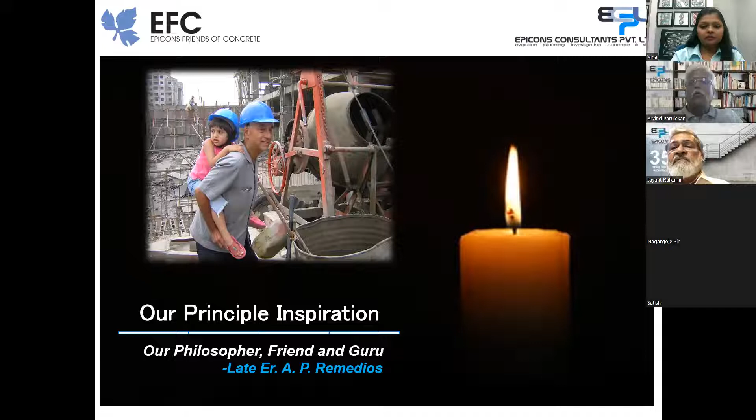Our inspiration goes to our friend, philosopher, and guru, late engineer A.P. Remedios. We started conducting workshops 23 years ago, and we conducted 79 workshops in 23 years, 35 webinars in the last 2 years, starting the webinar series since lockdown through our unit EFC dedicated to training. EFC is a humble effort to create a knowledge sharing platform and develop facilities for continued education for practicing structural engineers, corporate consultants, government and semi-government authorities, architects, builders, and of course faculty and students.

This is a quick graph of the webinars we have conducted. Today we are at Modern Materials and Technologies for Repairs, webinar 136. And the next webinar, which is actually a missed out number, will be a discussion on the first revision of IS 16700, on 19th November.

Our EFC team consists of, apart from myself, Mr. Anand Kulkarni, Mr. Ravindra Deshpande, Mr. Parulekar, Mr. Parashar Mugi, and Mr. P.P. Pandey. And with this, I conclude the introduction of Epicons Friends of Concrete on behalf of all the staff and our team members. Thank you.

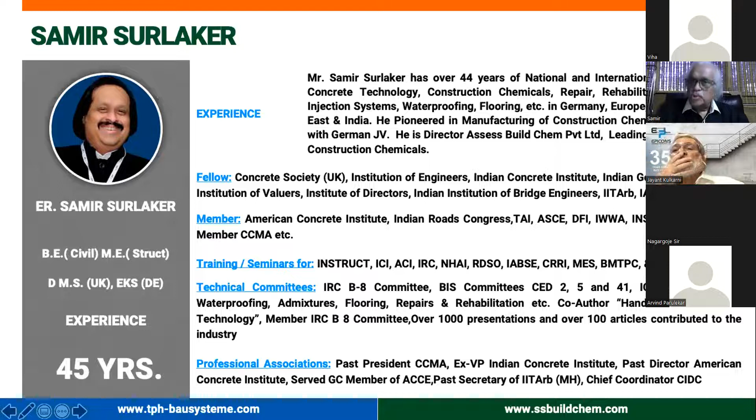I also thank Epicons, Friends of Concrete, and the Friend of Concrete is also my friend from VJTI. I really congratulate Epicons for conducting and disseminating so much knowledge through their workshops and training programs - I think no other person in the field of construction has done that. Now he has also chosen a very apt topic. And as Mr. Nagargoje rightly said, the problems of repairs are very difficult problems on the surface of it.

I shall try to make it as easy as possible. My presentation does not contain much of chemical equations and things like that, so I'll be coming straight to the main point. Concrete is the material we are going to talk about. And as Mr. Jayant rightly mentioned, concrete has got its problems.

It is very porous, and this porosity is one of the main reasons why the deterioration mechanism takes place. Concrete has got two very simple things: it has got cracks and capillaries. It is a water-based system - you can't avoid it.

These are the different causes of deterioration, which have also been mentioned subtly, and it's enough not to go into details as I'm talking to professionals. There is more knowledge facing me than facing you - you are all experts, professionals who have got a lot of experience in the field, so I don't think we should waste our time on some basic things.

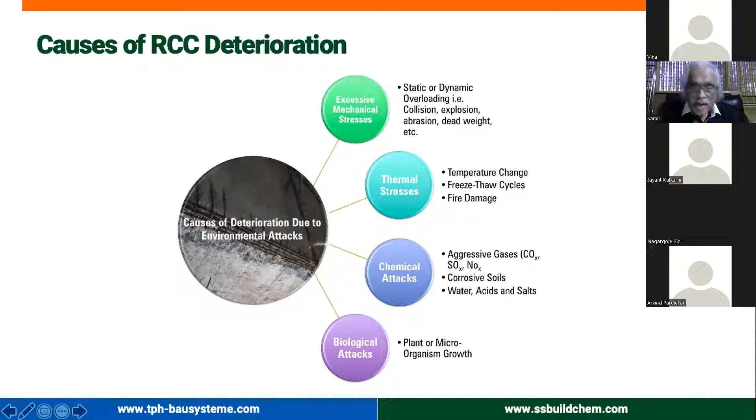The deterioration of concrete is a normal thing. It's a fallacy for us to assume that we can cast concrete and just leave it like that to fend for itself for its service life of 150 years. It requires a very strong and healthy asset management system, and this is exactly what we are missing in our country. We create the structures, but there are no asset management systems. Therefore, no budgets are provided for asset management, and that is one of the reasons why you see most of our structures are distressed.

A very simple thing: it's the carbon dioxide, chlorides and water that create corrosion. Basically, concrete is a basic system - the whole protection to concrete comes from its cover. That's the whole concept, it's so simple. But in reality, in our country or any other place, the concrete cover, which is supposed to be the best part of the structure since it is directly in contact with the environment at the concrete interaction stage, is actually one of the worst parts.

It has a water cement ratio 0.1 more, and it has 45 kg per cubic meter less cement. So this is how the concrete cover starts getting breached through carbonation or chlorides.

Basically, to take precautions, we should have very good quality spacers, bar spacers. The ones we are using are not healthy - if you look at it, these are very healthy bar spacers. Bar spacers have also got a code of practice, and these are tested, good quality bar spacers. This is approved even by the bullet train project. It is tested for sustainability - made out of green concrete - and tested for durability, that is for rapid chloride testing. So use good quality.

Then the simple corrosion, what we were taught in SSC - corrosion involves the most important things: chemistry and electricity. It goes through two stages: initiation and propagation. It's basically such a simple topic which people have tried to complicate, using a kind of psychological maintenance system to tell you something complicated about it.

It's a very, very simple thing to repair the concrete. And the code EN 1504 makes it very, very simple, uncomplicated. I would say to the extent it is almost non-engineering.

Carbonation is nothing, but since there is constant acid rain, the pH of the concrete starts shifting from 13.2, and the reinforcement bar, which is used to stay in the alkaline condition, starts getting into the acidic zone, and the rusting starts. Such a simple process. By rusting, what happens physically is the volume expands up to about 7 times.

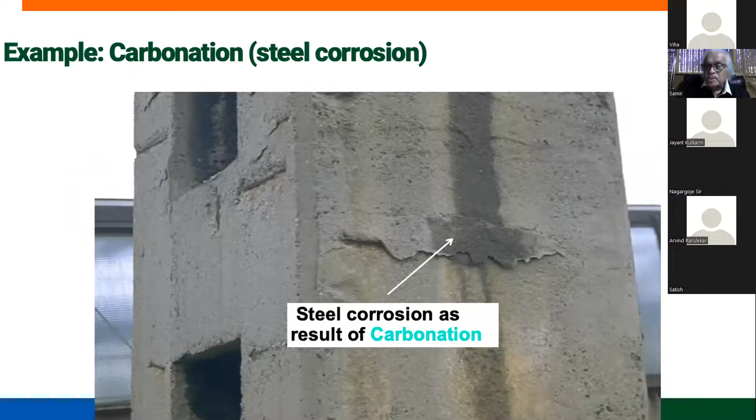Concrete is not so good, or concrete is bad in tensile stresses. So eventually the cover gets cracked. Once the first crack occurs, more deleterious substances, more acids enter the reinforcement and enter the concrete, and the rusting starts. The corrosion controlling constituents which create the corrosion and rusting are to be arrested. And once you repair, the main thing is to stop that corrosion at that status quo. So this is due to carbonation.

With chlorides, it is a little bit dangerous because there you get something called corrosion by pitting, and pitting is where you get, say, the reinforcement section goes tremendously low. This normally happens in marine conditions, or also many buildings in our city, like the Bandra Kurla complex area. There many structures are having a lot of chlorides.

So you exactly know how much time it will be before rusting occurs. Now we have these tools available to us. So my request to top level people like Mr. Agarwal and the MMRDA, the specification makers and the consultants, please use these tools to find out what is the residual life of the structures.

These tools continue to give you the systems of repairs, even the systems of repairs which are highly dependent on the money available. It can tell you that if you make X repairs, it will remain for 5 years. If you make Y repairs, it will remain for 10 years. If you want it to remain for 40 years, this is the method to be adopted. I think for a country like ours, with limited resources, this will be the thing.

Now, this is what happens. The water comes, and this is another major problem that building societies face, Mr. Nagargoje, Mr. Sen. The water which is exhibited inside your house is coming from the wet areas of the person on the top level.

It is very unfortunate because we have constructed it by fault. And sometimes, in many new buildings, we have to make the toilet blocks in places where it is not provided. I shall also be touching on this shortly as time passes, but this is what happens. And the person on top of you does not allow you to touch, saying nothing is happening to me unless something starts from his top.

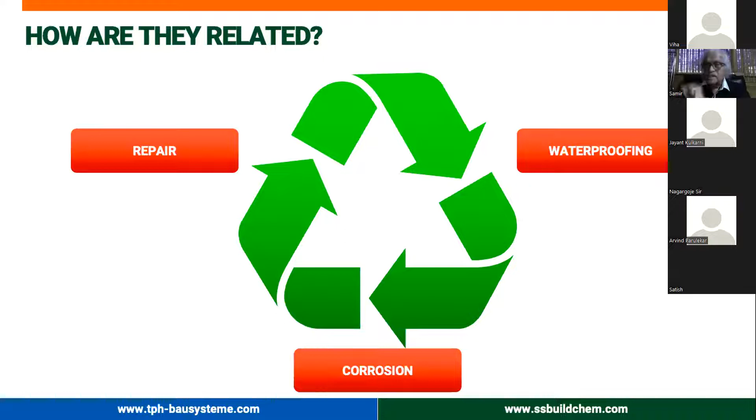So we have two types of things. We have waterproofing, which is preventive, which I think we are not here to talk more about. But even if you want to shift a toilet, I said just touch that portion, and the rest of what we are doing is everything remedial. Remedial waterproofing is nothing but repairs. I think this is how these things are connected.

So the logical steps of action: concrete, we don't have that much money, bridges cannot be just thrown out, so concrete needs to be repaired. Then how do we do it? So materials are the key. The materials are the key.

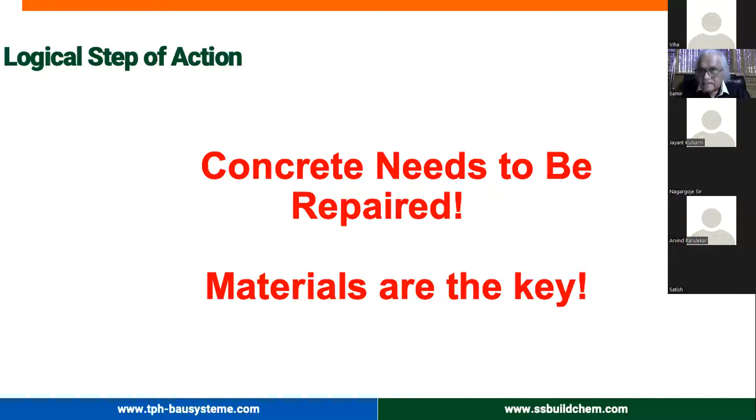In spite of it, please do not take - I'm a construction chemical manufacturer, I've been president of CCMA for 5 years, active member - please do not take specifications from construction chemical manufacturers. We do not supply any construction chemicals as part of our policy, since Mr. Jain talked about his policy. We supply materials to repair only when a structural consultant has given his okay. It's not my job. My job is only to make a material of the properties as decided by the structural consultant. It is basically engineering, not materials.

I make the materials, and now the biggest problem in the world is the durability of repairs. Those days are gone. Now people are making repairs, and when they make it with wrong materials, not stopping the corrosion, then the durability is affected. And that is costing the country more and more and more money. I think this should be stopped.

I shall also show you the development in that a little bit when I come to it. There are ways, but they are not rust converters. Rust converter means instead of Fe2O3, if you make it FePO4. Then he said use 20% SBR solution or acrylic solution, cure all - that means one pill for all the things.

We did this, and I said just keep it below. It was repaired - there's reinforcement here, reinforcement here. Within about a week or two weeks time, the crack surfaced. It's very easy to identify a repair crack which comes through reinforcement - it is straight. And then they changed the specifications.

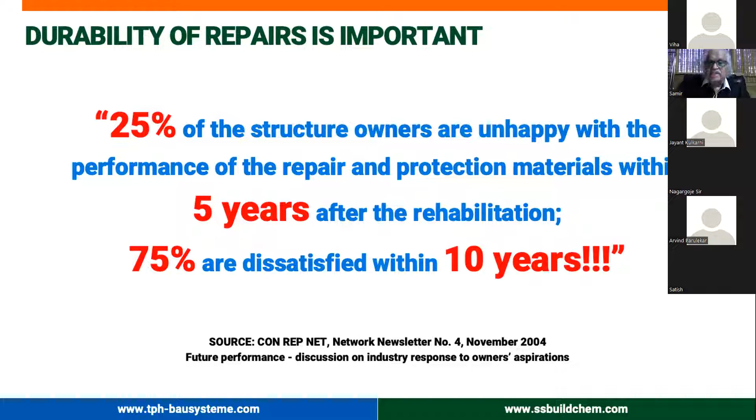So this is the standard statement. Most of the statements I have not said. Everywhere down below, the sources are given. 25% of the structure owners are unhappy with the performance of the repair and protection material within 5 years, 75% are dissatisfied within 10 years. And this is exactly where our money is drained out.

So first, all the NDT, where Epicons and other companies can do all the NDT testing. After doing the testing, normally they give you big 50, 60 page reports. It's the same as when you go to a doctor, he gives you an ECG in different colors, but you don't know what is to be done. The aim of diagnosis is only to find out the loss of section. If the section of the bar as existing today is less than 80% of as designed, it is a structural repair. Both the steps overlap.

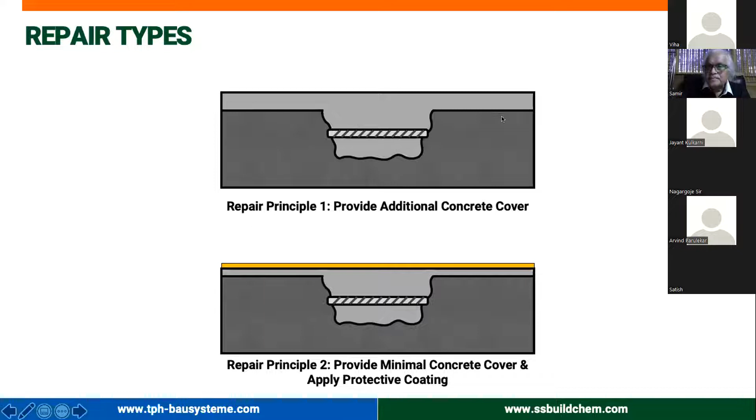Repair means creation or recreation of cover. You can create it, whether by guniting, jacketing, replacing, or reprofiling. But when you cannot do it, we have to resort to a coating, which is also calculated: X thickness of a protective coating. The protective coating varies from Jammu and Kashmir to the sea. This gives you something called equivalent cover. This can all be tested and done in India. What is important is you have to recreate the integrity. A good bond coat is required. Anyway, I'll go a little quick.

So any repair system designed with predetermined materials in mind will lead to failure. You go anywhere and you find a column which is distressed.

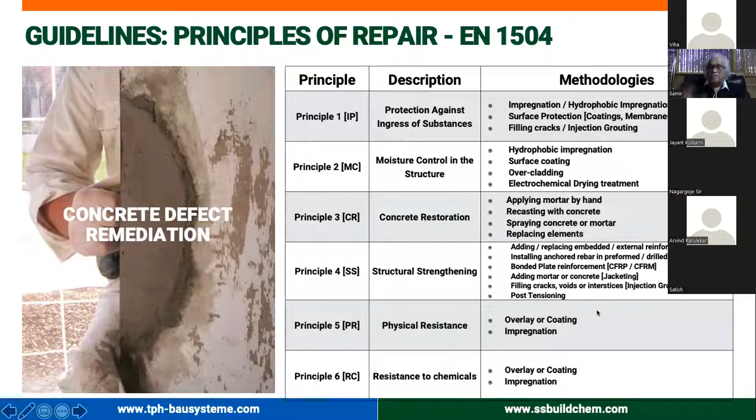So principle 1 means, just to give an example, protection against ingress of substances. The methodology is impregnation, hydrophobic impregnation, surface protection, filling cracks and injection. It doesn't say that if the structure is suffering from principle 1, you go here. You go on adding replace embedment, you go bonded plate reinforcement, you make post tensioning. And this is exactly what happens. If this can be stopped in the country, I shall be very thankful that my 40 or 45 minutes will be used.

Sir, you want to ask a question? Hello? Nagargoje sir, you want to ask a question? No, sir. No. Okay, because I saw your hand. No, no.

So this is the thing. We don't have to use it. I saw a specification in Goa. You'll be shocked. It is in Goa, our building of Kala Academy, which I think Mr. Jain knows well. It is a 10,000 square meter area. Migrating corrosion inhibitor is specified. A repair which could have been done in 3 or 4 crores is done in 49 crores. And now it has gone for inquiry. It's very unfortunate in a country where we don't have money that we are going into these things.

But this is very, very clear now. Know the principle. This part is made by us. This part is made by the material manufacturers. Whether you go to us or you go to Sika or BASF, you will get the same answers. Go to ethical companies, go to ethical engineers, and then I think you'll be able to save a lot of money. So these are cracks that you know. Cracks means injections.

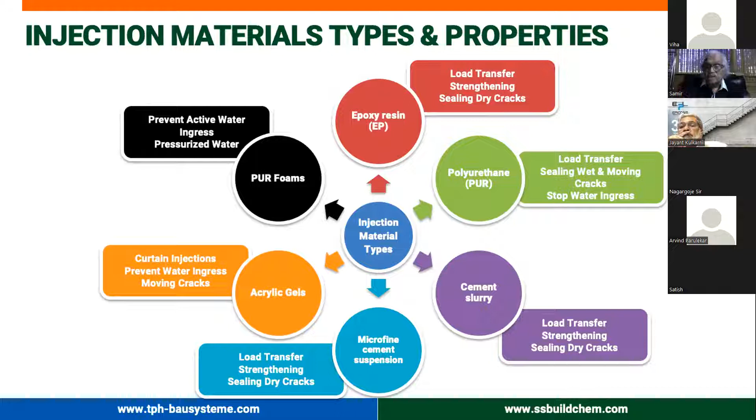Just to remove and dispel all this doubt, I made a presentation to CIDC, to government, of about 30 to 35 minutes, in which I showed the different methods of injections. And for trained people, these are available in the country. It depends on the width of the crack. It has got several things. These charts I can send you, which material is to be used in which cracks. And please go to the experts.

We can sit on the same side of the table and argue about it. It is not what is the cost. The very second question is, what is the cost? Cost of what? So there are ways. And then there are machineries. When you use modern materials, you have to bring in modern machineries. When you bring modern machineries, you have to get people trained.

I have trained 25 people in Germany over the last 20 to 25 years. And we are the only company having applicators all over India, and we can solve any waterproofing problem, including the one I showed at the top. So it's a different type of packers to be used.

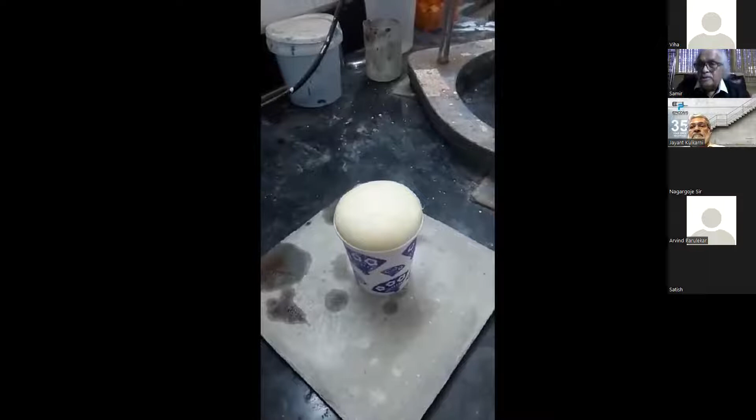But this is very impressive. This has got a life of 3 months. And waterproofing and the concrete should have a life of more than 150 years. So these are different other types of resins. So please be careful.

So these are now other polyurethanes. They are compatible, but they don't foam. These are very flexible. This can be used in this type of problem, when the water is coming from the bottom. We did a project here on Park Road Beach, a brand new building. We did about 55 lakhs of repairs, injecting it from the bottom. But it is not a foam. This is by injections. This has got an engineering life of 140 years, with certifications. Plus, it is sustainable.

So this is where the problem comes from. These are the problems in toilets. This is the system we have adopted. So water comes in. And these are the modern tools, modern means. Whenever you do repairs, you've got this type of sleeves available. These are also not plastics. These are a very special material made by only one company in Germany, and we all buy from them. This is flexible polyolefins, and it remains for 40 years. So this will stop it. It is not a rubber. It is not a PVC.

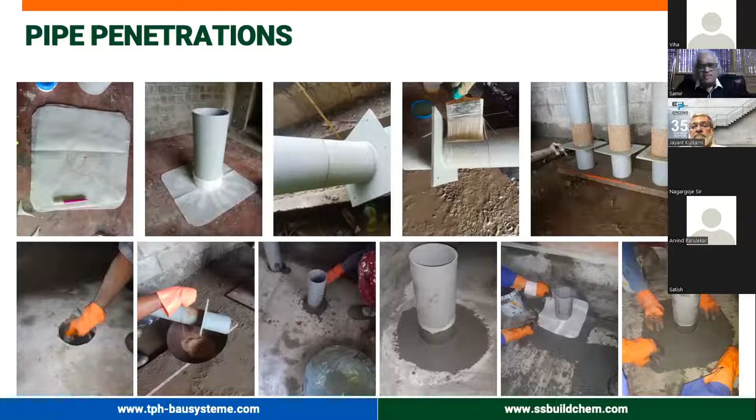The moment someone does it, another person says, I can also. These are the tapes, your flashing tapes. If you use this type of flashing tape at every corner, it can stick with the tile adhesives. Put a tile here, put a tile here. Water will never go through it. No joint sealant is required. So when you're shifting the position, you can use this on the whole area. You can make a bathroom anywhere you want by puncturing the slab using these techniques. I've got specifications; I will give them to you.

Then the normal things to be done. A tile adhesive is compulsory because new tiles don't have water absorption capacity. You have to have a chemical bonding. And now be careful of the details. You see, beautiful engineers.

You see now he has put the drain. The drain is not at the bottom, it is on the top. So please be careful. Detailing is very important. We have got detailed specifications for all the different types of toilets with all different types of materials. This is for a flat slab.

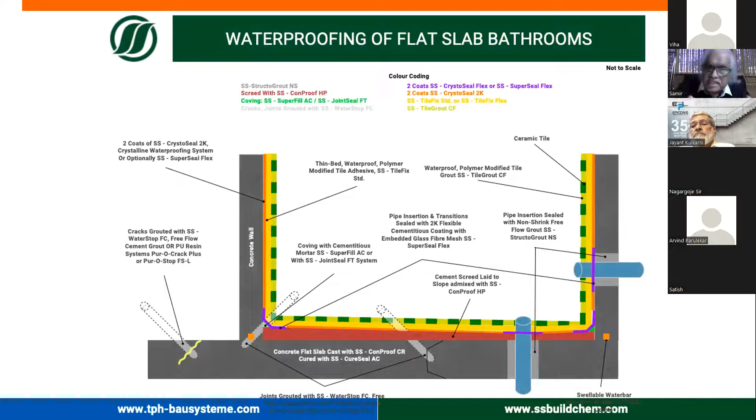This is for ones which are wall mounted. This is for ones where we are already having some problems. You can inject it from the bottom. But different things have got different systems. Then come the problems from the walls. This also can be solved.

Then we have got very specialized new plaster admixtures, which can make some beautiful plasters. I don't think we'll have time, but we can use those things. We have also developed specialized plasters which can take a 5 bar pressure. 5 bar means 50 meter pressure. You can simply put it from outside and water won't go inside. It is hydrophobic. Even when you break it inside, there is hydrophobicity.

So positive waterproofing from the negative side. The gels allow you to do this. If you can't go out, we are in a position to inject through and through your basement walls. We can go below the basement, on the side of the basement.

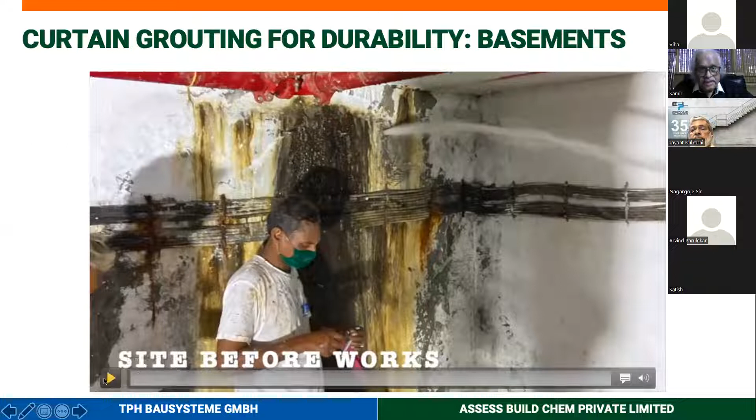This is one of the basements, 16 meters below, which we did in Bandra Kurla Complex. You can see it here. I will not run the full videos, but you can see the water coming. This is the 6th basement in Bombay, or Mumbai. But you need the right materials, right machinery, and right applicators.

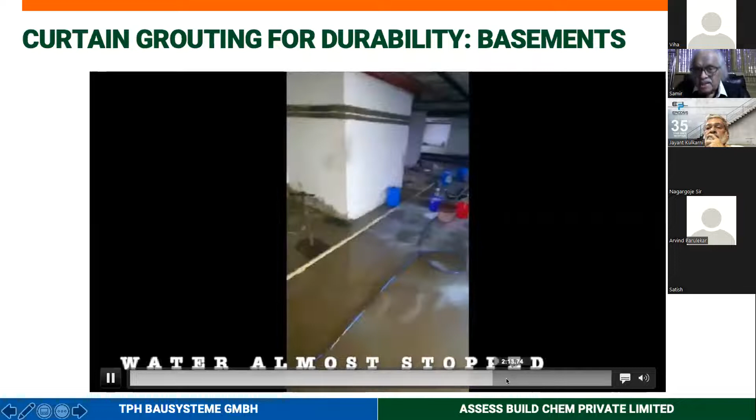This is the machinery. These are the materials. And we have these materials in our country. In about 2 hours or so, it is totally stopped. It is not by putting some cloth inside, some lead inside, some cement inside. These acrylic gels can stop the water within 9 seconds. So these things are available. Please use them to your advantage.

Now these are tested. It has got a test report. These gels are tested for 20 years. The normal gels which have been used in the country have a life of 3 months. That is poisonous. It harms your groundwater sustainability. This has been tested for 20 years for its expansion and contraction because these are fortified gels. And this has an engineering life of 120 years.

We are engineers. Let us have the engineering life. The other gel is only 3 months and poisonous. And when it comes to sustainability, I would like to read this. These are still used in our country without asking. This is acrylamide, where a big accident took place. Because this is in the public domain, I don't care; the name of the company is put here. This is 75 rupees per kilo. You see here.

330,000 kg of milk had to be thrown away. 370 animals had to be slaughtered. 29 private wells were found contaminated, and this is in Europe. So for every material that you purchase for injection, which is going to come into contact with your groundwater, especially in places like the Himalayas where the Ganges water is so pure, please ask for a groundwater safety certificate.

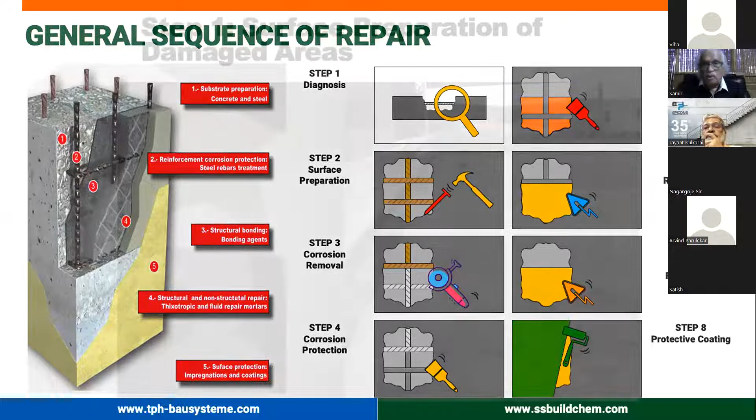Sustainability. So this is the normal. This I'm not going into; these are with old materials. These are the steps of repairs. I will wind up in another 10 minutes, so don't worry. These are the steps of repairs. Each and every step is important. Surface preparation. Then you have to stop the corrosion, at least at the status quo.

These are different ways. There is natural protection by alkalinity, which is the best one. Then the epoxies, that is the insulation. Then there is cathodic protection. Different principles; you can use any principle. Now these are very specialized coatings. These coatings can be used for steel bridges.

We can repair a 100-year-old steel bridge within about 1 day, without mess, without sandblasting, without harming the environment. This is a product which is as per P11, as per EN 1504. It is called an oxide converter. It arrests the process of oxidation. It is an active coating and a barrier coating. It stops the corrosion within 20 minutes.

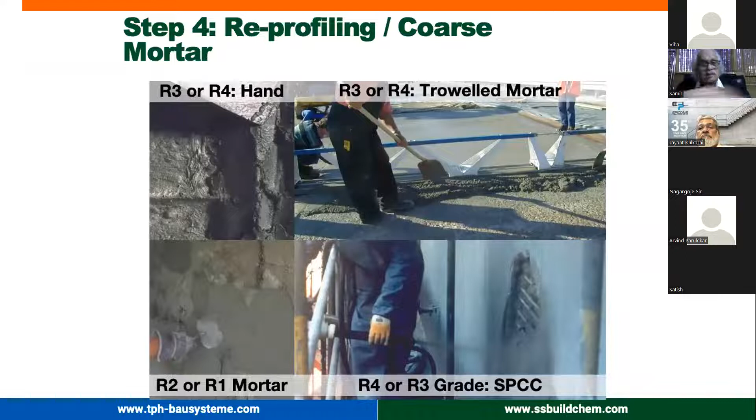It is also having a surface barrier. So then bond coat is the most important part, because homogeneity is to be established between old materials and new materials. You can create the mortar whichever way. You can cast it. You can put on hand-packed mortars. You can use a micro concrete. This is what we call concrete replacement. You can do guniting depending on the areas.

And now you see the simplicity. People will tell you, please use a material. It should be fiber containing. It should be X containing. It should be Y containing. No, very simple. Structural repair: the EN 1504 categories. Structural repair category should be greater than 45 MPa, category R4 plus durability required. Non-structural repair so and so, that is in heritage. We have also a full range of heritage mortars, which is lime based, no cement. It is so simple. So performance criteria must replace the prescriptive criteria.

So properties of the cure, you see how simple are the properties. Fresh mortar should have a reduced water demand, quick and complete drying. What they do is to cheat you. They put microsilica inside. When you put microsilica inside, you get cracks. To stop those cracks, they put fibers inside. And then they tell you it should be fiber. What the hell do you have to do with whether it contains fibers or not? Your job should be: it should be low shrinkage, test the shrinkage, high tensile strength, enough flexibility, and a strong bond. So let us make it very, very, very simple.

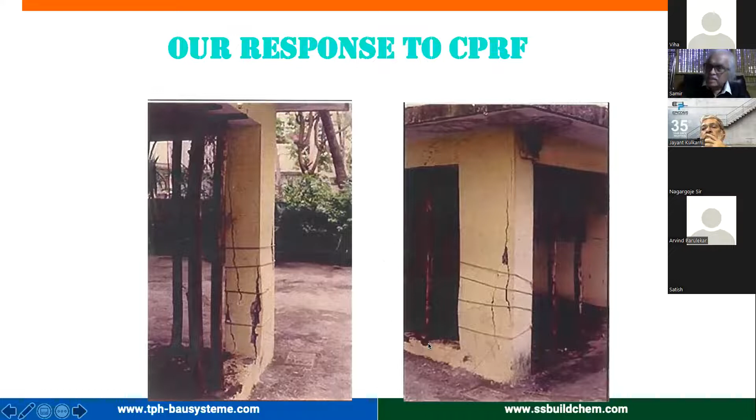But same thing is what we are doing. This is the advancement, new materials. We are having something called FRCM system, fiber reinforced cementitious matrix. This is not a mesh. This is a net. Epoxies have got, not shelf life, pot life. So when it becomes hot, I think our friend is talking on the fire resistant mortars, the epoxy starts melting, even in Rajasthan, because after 55 degrees the glass transition changes. This is cement based, so it doesn't burn.

There is a code of design. This has to be designed. This is in 2018, Guide to Design and Construction of Externally Bonded Fabric. But they don't want to bring it to our country, because they want to cheat you with fabric, with the sari wrapping, with epoxy resins, with cementitious mortars. Tested for fire resistance. How is it to be done? Very simple. You put a mortar, you put a fiber embedded, you close it.

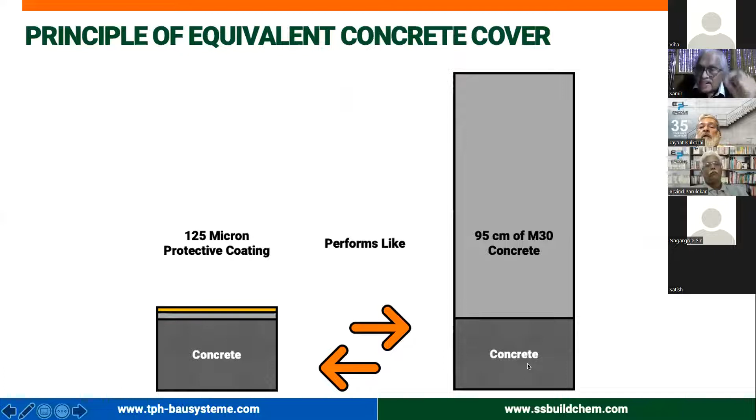And the last step of repairs is a must. It is protection of concrete, by anti-carbonation or any other coating against chlorides. Because if you see here, your life in years depends solely on carbonation, initiation of corrosion and propagation. So this is anti-carbonation coatings. You can also measure it engineering-wise: 125 micron of a protective coating performs like 95 centimeter of M30 concrete. So an equivalent cover can always be calculated in India, tested in India, specified in India.

If you see it here, it should have a crack bridging capacity in bridges. Now, without putting all these things, they will say it should have interpenetrating network, 2 coats, 1 coat micaceous iron oxide pigments, 2 coats epoxy, 4th coat polyurethane. So this is nonsense. Because epoxy is not flexible, epoxy is not ultraviolet resistant, epoxy has no breathing capacity. So why do you use it when there are codes of practice?

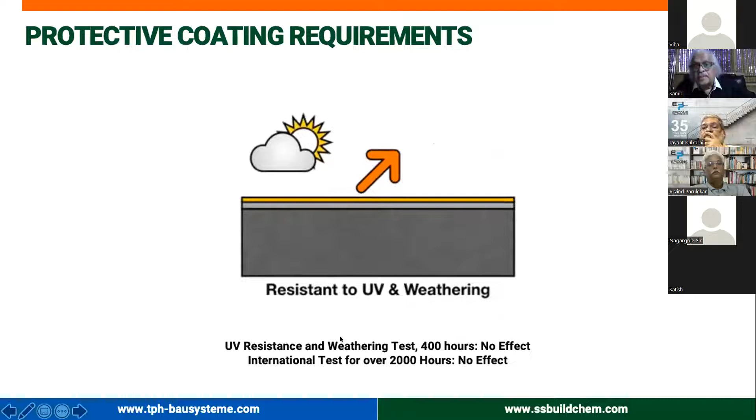It should be chloride resistant when you are using it in coastal conditions and in water. Crack bridging is very, very important for dynamic loads, all our bridges. And we started using this in India about 25 years back. And the bridge that we did in Kerala for HCC is still living. We did the JJ bridge, M75 concrete. The consultant who came asked why do we want it for M75 concrete? We quoted it. He said it will increase the life of the concrete by 36 years.

So this is important. Crack bridging capacity can be tested in India. It should be open to water vapor diffusion - contradictory as it sounds. Water should not go in, but water vapor should escape. So this is how it is.

By virtue of chemistry, the small fishes can escape out. It is like this - water vapor can go out because it has a low molecular weight. This is the breathable coating.

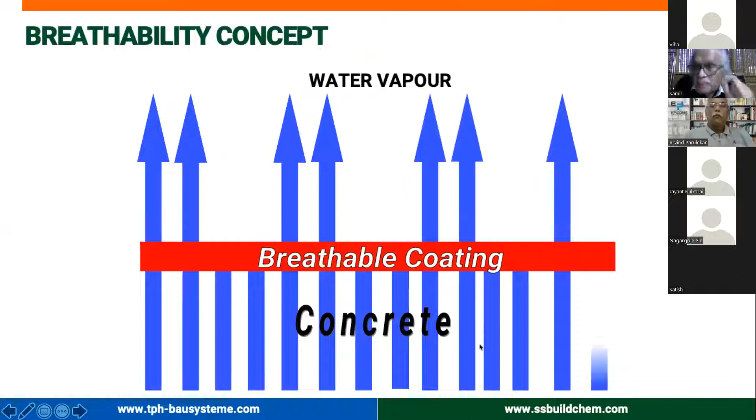Every property can be tested - engineering empirical test values. We mentioned it in the IRC B8 committee more than 10 years back. SP80 has specifications - make one line specification: the anti-carbonation coating should be as per IRC SP80, discussion over.

It has 15 properties to be tested - from specific gravity, thickness of the coating, dry film thickness, solids content, type of things, color changing, recoatability, tensile strength - very important - elongation, salt spray test for chlorides, and crack bridging capacity.

Diffusion against carbon dioxide, which is most important, should be more than 50. Breathing capacity should be less than 0.4. When you have the codes, then why let a professor of English write your specification?

This is tested in India, can be tested at any place. Very simple - 18 tests or 15 tests. We reduced it to 3. Still there was a lot of pressure, but we said okay, fine.

This is the IR spectrum to know it is the same material - quality control. You take a 1 kilo sample, keep it with you, because he will supply you with some other junk material next time. Get an IR spectrum - it is like a thumbprint.

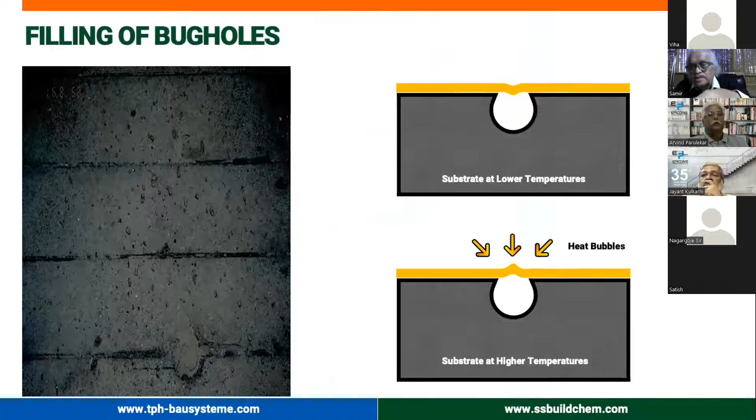This is important - bugholes and blowholes should be filled. Surface should be like this.

This is not putty - people use putty and create problems. This is a cementitious cosmetic repair mortar, should be part of the specifications.

Last step of repairs is mandatory. You cannot have your specification without anti-carbonation coatings. We have done more than 800 buildings in Bombay with consultants using anti-carbonation coating.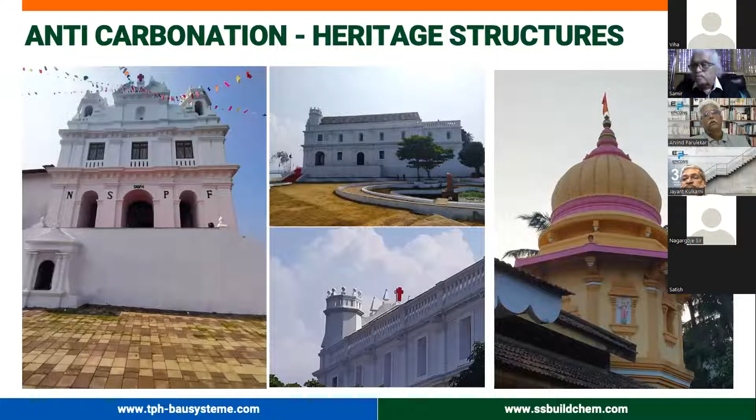It's a beautiful one. We do temples also - we are very close to God. So this is the conclusion: protect your concrete and steel will take care of itself.

Okay, so only one small point which I would like to show is safety. I will only talk on safety and training, another 2 minutes.

Training is more mandatory - I just saw Jayant's slides, so I added it in between. People always say, why don't you do it properly in India? Training is not available - but training is available. This is our training center in Goa, where we train about 30 engineers, entrepreneurs, supervisors. It is fully equipped and approved by CIDC.

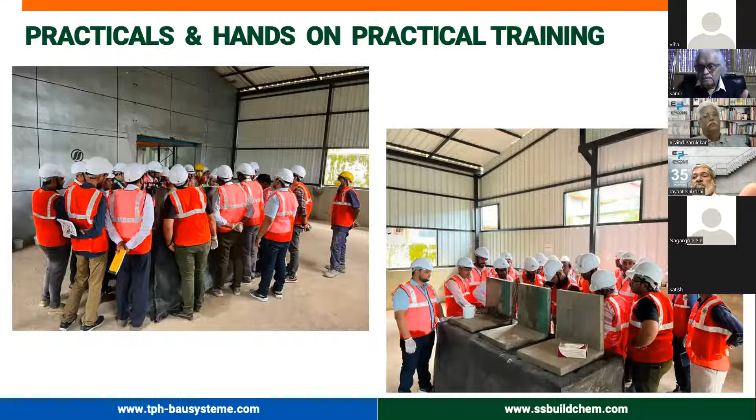Every person is getting hands-on training, no theory. Every person gets a brush in his hand, and everyone is dressed properly with masks. We don't use safety shoes here because it's not necessary.

Unfortunately, I had also filed my application as a trainer, but he did not give it to me.

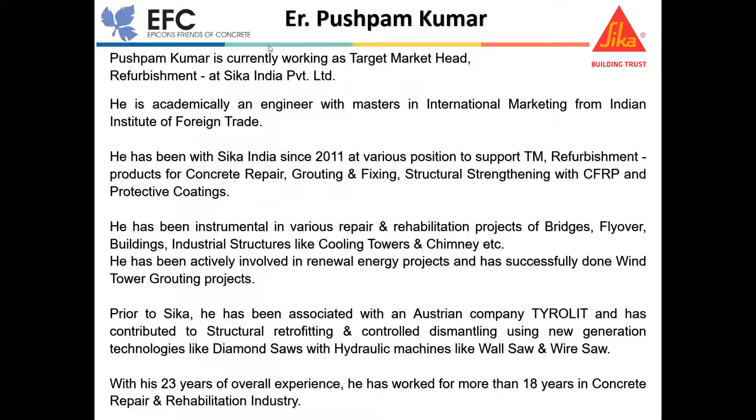Thank you. Thank you, Viha. So, good afternoon everyone. Thank you, Jayant sir. Thank you, everyone. As we have mentioned, I represent Sika. I would just like to give a brief introduction about Sika.

I would move to the topic of structural strengthening for RCC structures. And I really thank Mr. Samir, who rightly mentioned that repair and structural strengthening are two different aspects. He mentioned in one of his slides what happens when the reinforcement has corroded. So let us understand why we need structural strengthening.

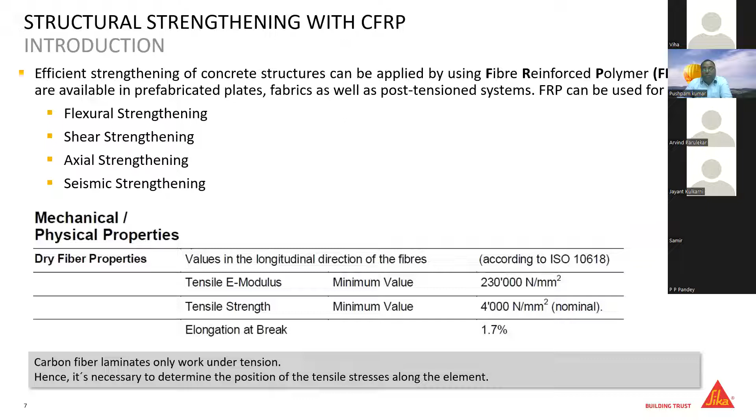So these carbon fiber laminates or carbon fiber fabric can be used for strengthening of any of the RCC members, but it is very important that we identify the tension zone, because the CFRP works only in case of tension. I'll explain in another slide.

When these carbon fibers are mixed with epoxy resin, they form a composite material. And this composite material has very high mechanical properties for enhancing the overall load carrying capacity of any structural member. Sika has more than 25 years of working with CFRP across the globe, and with epoxy, Sika has been working for more than 50 years, and various tests have already been conducted on the compatibility of CFRP and the epoxy and the interlaminar shear failure.

So these are very important aspects: any general epoxy will not be suitable for CFRP application. The epoxy resin used for carbon fiber should have different mechanical properties and a high glass transition temperature so that it is compatible with CFRP application.

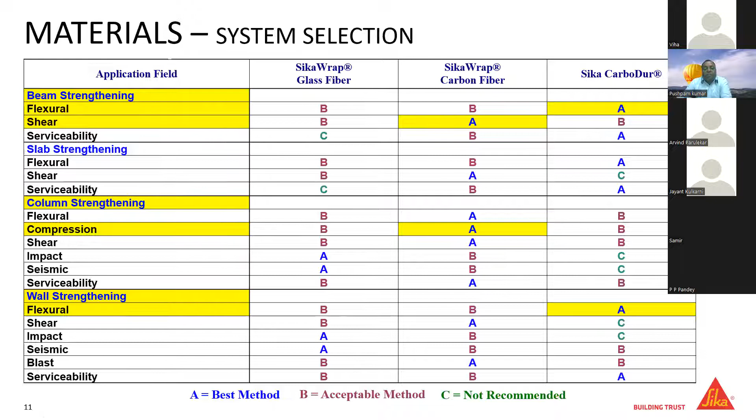In any building structure, like a frame structure, you can see there are various members and various requirements. For example, beam strengthening, column strengthening, pre-stress strengthening, or if any wall has to be strengthened, or if you are making a cutout, we need to strengthen the structural member.

If there is any cutout in the slab, we need to strengthen the slab section. So depending upon the application, we can decide what application would be required with the CFRP system, whether it is for building structures or for bridges. In case of a bridge section, for column strengthening, deck strengthening, segmental construction, box strengthening. So various applications are there wherein CFRP can be used.

I just have a small video just to show how this works.

CarboDur is a carbon fiber reinforced polymer used to allow concrete beams and floors to carry much higher loads. To show how much extra strength CarboDur can add, we set up a simple demonstration in the Sika warehouse. We took two concrete beams, identical in size, about 2 meters long, and in thickness about 5 centimeters by 5 centimeters. The only difference between them was that one had been reinforced with a Sika CarboDur strip. We placed the unreinforced beam on some concrete pavers, and then asked for a volunteer from the Sika warehouse to see how much weight it could support.

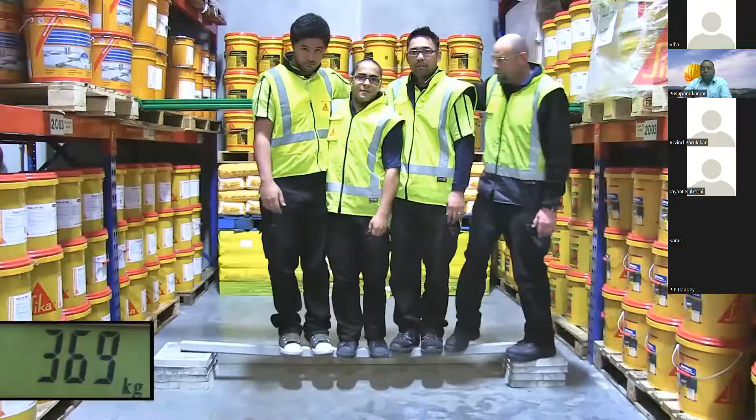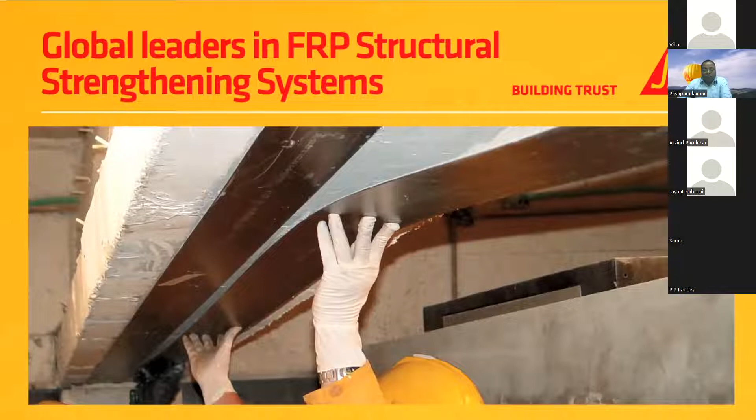Sika is a global leader in structural strengthening systems for the upgrading of concrete and masonry buildings. One innovative Sika product is a carbon fiber plate called CarboDur. Sika CarboDur is a fiber-reinforced polymer used to allow concrete beams and floors to carry much higher loads. To show this, we set up a simple demonstration in the Sika warehouse. First, we took two fiber cement boards identical in size and thickness, the only difference being that one had been reinforced with Sika CarboDur strips. Then we put a 25 kilogram bag onto the unreinforced board. Then another 25 kilograms. And not surprisingly, it broke. No reflection on the fiberboard. It's not designed for this treatment anyway.

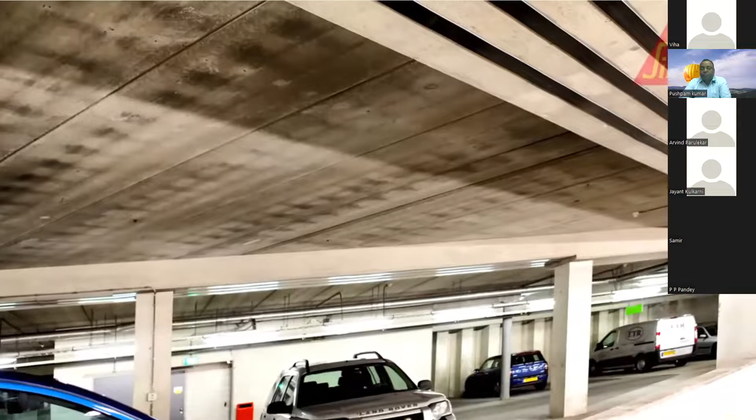But then we took the board that had been reinforced with the Sika CarboDur strips. On went 25 kgs. Then 50 kgs. Then 75 kgs. Then 100 kgs. Then on went 80 kgs of Navindra from the Sika warehouse. Not bad. Not bad at all. Then we added another 50 kgs, making a total of 150 kgs plus 80 kgs of Navindra again. Amazing. Sika CarboDur makes it easy to strengthen concrete beams and floors to meet modern design loadings or take heavier loadings. It's cost-effective, unobtrusive because it's so thin, and because it can be installed so quickly, disruption is minimal. CarboDur, another smart, innovative strengthening solution from Sika.

So here you have seen how this has worked for a beam or a slab section. We understand that every member has a different loading requirement, like the slab or the beam was designed for a certain flexure load carrying capacity, and later on it was strengthened. So let us understand from the engineering point of view what happens. In case of a simply supported beam, when the load is applied, there would be a deflection. So we have to first identify where we have the compression zone and where we have the tension zone, because as I mentioned initially, carbon fiber works only in tension.

So we have to first identify the tension zone, and there we can apply this carbon fiber CFRP for increasing the load carrying capacity. So this is the case for simply supported section. Similarly, in case you have a continuous section, therein you can see the compression zone and tension zone. So depending upon the requirement, you can decide.

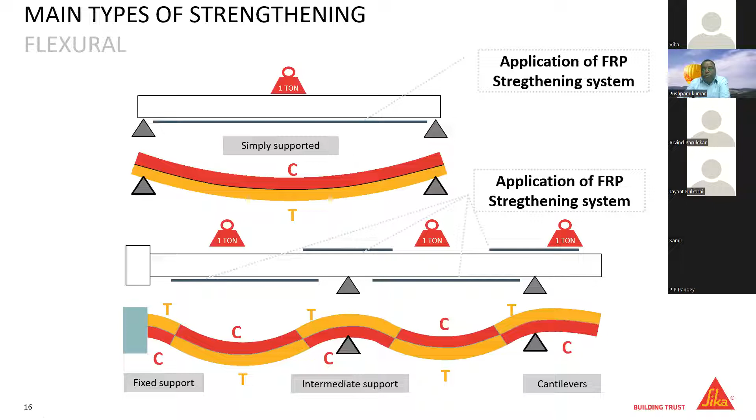So like here, where you have the tension zone at the bottom, at the support you have tension zone at the top. So carbon laminate or carbon fiber has to be used in the tension zone. You can see here at the bottom, and in this case, this is just reversed. On the top, it has been used. So similarly, we need to first identify what is the requirement, where we have the tension zone, and for what application we are using the CFRP for increasing the load carrying capacity.

In case of shear, what happens when we have load coming on the beam? If the beam is failing in the shear forces, it develops a crack in the shear zone at an angle. If you just make a comparison, the reinforcements are either placed vertically or inclined in the shear zone. So what we have to do? We have to increase the shear load carrying capacity or the flexure load carrying capacity for any of the beam section. So let's see first for the bending case.

In case of bending, only bottom reinforcement of the beam would be effective. Whatever reinforcement we have provided, for the bending only the bottom reinforcement is effective. When the forces are coming, this will take those forces and this will accommodate the structure. So in case I have to increase the load carrying capacity for bending or flexure, we can install carbon laminate at the bottom of the beam.

Similarly, in case we have to increase the shear load carrying capacity of any of the beam section, you can see the cracks or the shear forces are there at the shear zone, or this crack line will develop in case of shear failure. So what we do in case of shear strengthening, the rings which are provided at the shear zone, this is strengthened by CFRP by confining the shear zone.

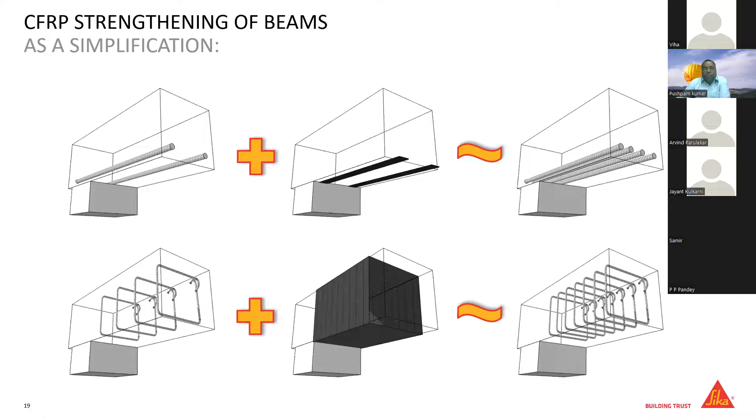Sika is a global leader in structural strengthening systems ideal for the seismic upgrading of concrete and masonry buildings. One innovative Sika product is Sika Wrap, a reinforcing fabric made of either carbon or glass fibres. Sika Wrap is wrapped around columns and bonded to masonry walls, helping a building to withstand much higher earthquake loadings. To help show this, we set up a simple demonstration in the Sika laboratory.

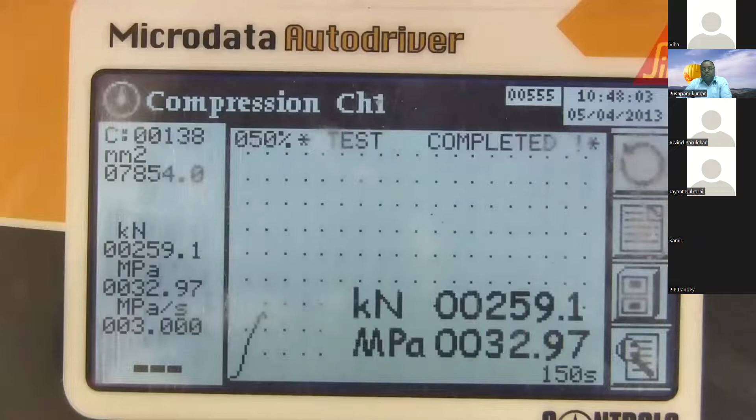First, we took two concrete columns, identical in their size, weight, and compressive strength, the only difference being that one had been wrapped with Sika Wrap. Into the compression tester it goes. We are doing the compression test. It's a very easy test; it can be done in any lab. On goes the compressive force. And within a very short time, the unwrapped concrete fails, just as it could in a real-life seismic event. So you can see 32.97, so 33 MPa with the grade of concrete.

Then we took the column wrapped in Sika Wrap, another specimen with CFRP. You can see the difference. On goes the compression force. And we wait. At this point, the unwrapped column had failed. When close to double the compressive force is exerted on it, finally the Sika Wrap column fails. 69.92. So from 33, it is close to 70.

Sika Wrap makes retrofitting concrete columns easy, and meeting New Zealand's new earthquake regulations easier too. So to generalize, by doing one layer of CFRP, the load carrying capacity will increase. It's cost effective, unobtrusive because it's so thin, and it can be installed quickly so disruption is minimal.

The axial forces which are coming on the column are getting absorbed by the CFRP, and the load carrying capacity is increasing. So just as a graphical representation, you can see there is a column section. When the axial load is coming on the column, the column will try to expand, and there would be a bursting tendency in case it is exceeding the limit.

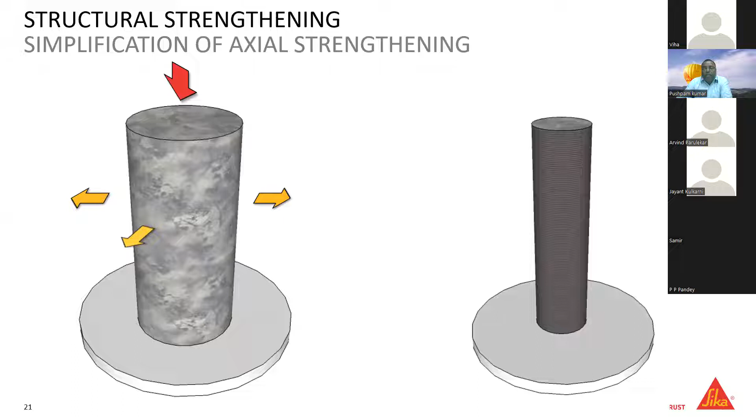So what we do for taking the additional load, or in case the reinforcement has corroded or the load carrying capacity has reduced, we do the confinement depending upon the loading requirement. So whatever additional forces are coming, we need to calculate, and for those additional forces, we can do the confinement. So there is complete engineering behind it. There is a design criteria. There is a defined approach for doing the application.

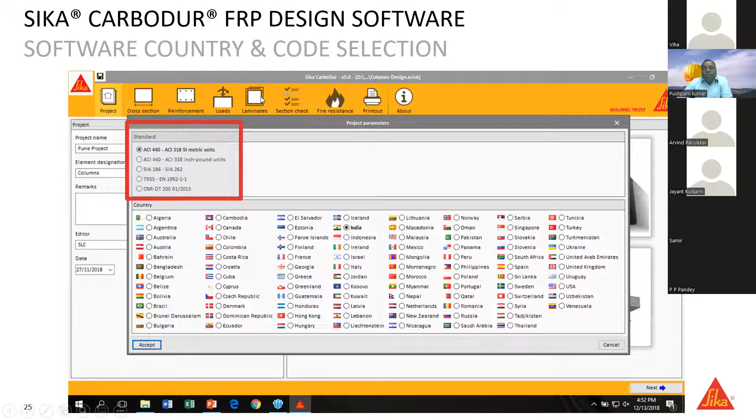And when you start designing, you get the different stages. Therein you provide the current condition, like here you can see the cross-section detail, the reinforcement detail, the loading detail. And when you provide this loading detail, this will give you an option to calculate. And when you do this calculation, this will give you an output. A detailed report would be shared with you. Instantly, you can download this report from the software itself, and you can see every calculation is provided. Any designer can do manual calculation also, but the software is very effective in terms of quick calculation.

So this was on CFRP section, and the next topic which I would be talking on is passive fire protection, and this is also effective for CFRP section, because the CFRP, carbon fiber reinforced polymer, is installed with epoxy adhesive, and these epoxy adhesives are very sensitive to higher temperature. So there should be some fire protection. In case of fire, the behavior of CFRP section is different. So we need to protect it for fire situations.

So let us understand what is happening today. Especially in urbanizing situations we are going vertical, and when we are going vertical, the risk of fire is increasing, and this fire risk is for people's life. So we need to take proper precaution for fire protection of any of the standard sections of RCC structure. So before I go for fire protection, I just have a small video clip. I'll just play how this fire protection works.

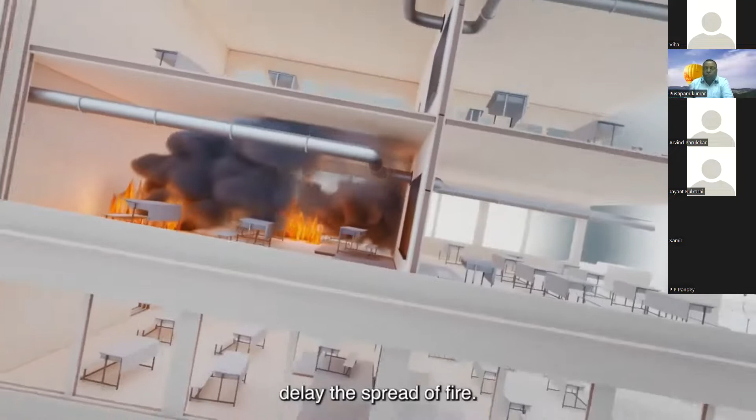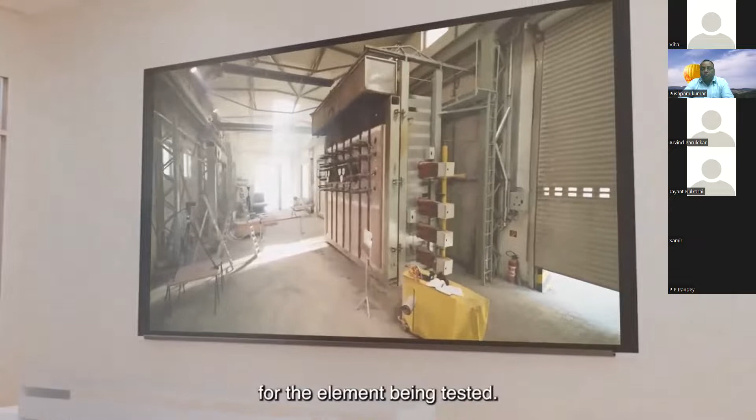Hi, my name's Scott. Everyone knows what firefighters do to keep people and buildings safe, but actually we're just the tip of the iceberg. A building on fire could collapse at any moment. Every second counts. That's why passive fire protection solutions give us extra time to do our job safely. Fire spreads extremely quickly through a building and is almost impossible to stop. To prevent this, buildings are divided into fire compartments, separated by fire-resistant walls and floors. Joints, pipes, or cables represent leaks from one compartment to another. Sika's fire protection products seal these leaks, which will drastically delay the spread of fire. When it comes to managing a fire, it's not just about the spread of the fire itself. Also, the damage of loaded components plays a significant role. Reinforced concrete, for example, may lose its load-bearing capacity and static stability when exposed to fire. Sika's fire protection mortars delay this happening, as the air encapsulated in the product acts as an insulating layer, gaining valuable time for evacuation. Fire protection mortars are mainly used in underground car parks, tunnels, or industrial facilities. For me as an architect, reliability is everything. Fire protection is about protecting people's lives, and it's my responsibility to make sure that it's taken into consideration from the very first sketch. We only specify systems that are third-party tested and certified according to relevant international standards. Sika's passive fire protection systems are tested by accredited international test institutes. In a fire test, a building component, including the relevant Sika solution, is exposed to a fire. During the entire process, temperature and other relevant parameters are recorded. This information is then used to determine the fire resistance time for the element being tested. As a fire stopping contractor, I am responsible for the correct installation of passive fire protection systems, and Sika is my reliable partner. With on-site trainings, technical documentation, and a wide test scope, they support me to take on this important responsibility. Passive fire protection plays an essential role in today's building industry. Sika has over 100 years of experience in building excellence from basement to roof, incorporating passive fire protection at every stage. Our comprehensive fire protection product portfolio and our motivation to protect people, buildings and our environment are reflected in our company ethos, Building Trust.

So here you've seen how fire propagates within the building structure. The fire happens at one part of the building, and within a short span of time, it goes all across and the complete building is engulfed in the fire. So let us understand why we need fire protection and where we need fire protection. Tunnels, the confined locations, high-rise buildings, apartments, commercial complexes, any of the commercial buildings, especially data centers, server rooms, the very sensitive areas, and the CFRP protected standard sections. So there are various areas where fire protection is required.

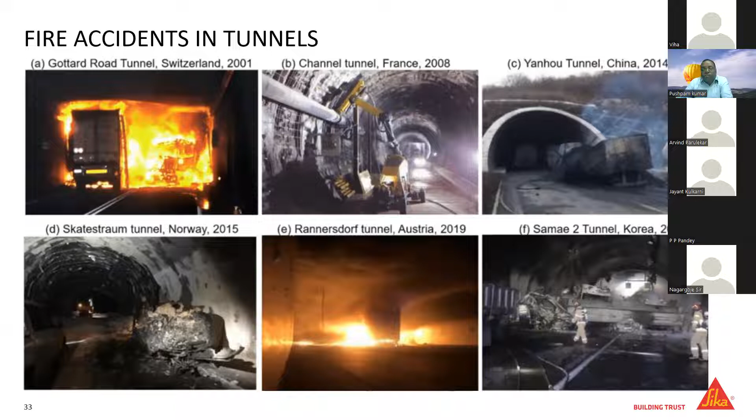Hospitals are one of the problem areas, especially in the last two years. We've seen more than 100 people lose their lives during the COVID period because all hospitals were working at maximum capacity, and fire became a major challenge in these buildings.

What happens when fire breaks out in a hospital? It's not the end. When the building catches fire, it gets damaged and cannot be used further, so the complete hospital has to be shifted to a new building, which is a time-taking process. This is why we need a resilient structure where fire damage doesn't extend beyond a certain point, damaging the structural members, or can be confined to a very close location.

Active fire protection is already in use, like fire sprinklers or fire extinguishers in buildings. But today, as we go vertical with much more critical applications, this alone is not effective. We need passive fire protection as well.

So in case of fire, the damage can be stopped and confined to a specific location, or the structural damage can be controlled within that confined area.

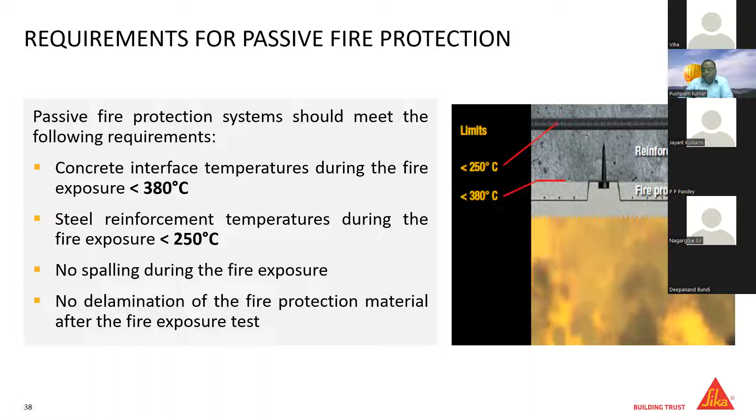There are various systems available, like penetration seals and linear seals, for controlling fire and confining it to a closed location. These fire protection systems are certified as per various international codes, like European codes or UL standards, against which they are designed and rated.

In India, Sika has started a fire protection mortar. This is a single component cementitious fire protection system containing silicate aggregate, and it is very effective for all kinds of RCC structures, even for FRP-strengthened sections. It is a very lightweight material.

The density of the material is hardly 500 kg per cubic meter, and it can be used in layer thicknesses of 20 to 40 mm depending on the fire rating. The material consumption is around 5 to 6 kg per square meter for 10 mm thickness, so the dead weight added for protecting the building structure is very minimal.

This fire protection mortar has certain properties - the reaction to fire should be Euroclass A1, and it should have thermal conductivity and tensile adhesion strength with the concrete section as defined by various codes.

This product is tested as per ASTM standards, with clear guidelines, especially for the combustibility test as per ASTM E136, where the specimen is exposed to fire at 750°C and checked to ensure there is no impact from the high temperature. This combustibility test ensures the mortar is non-combustible in nature.

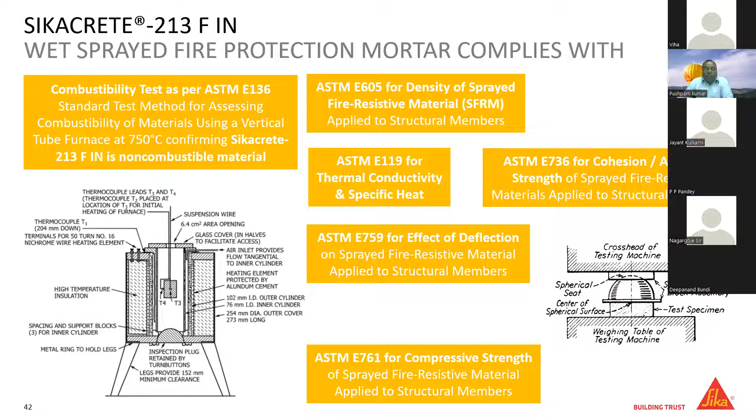There are various tests for which guidelines are defined, like ASTM codes, against which this test is done. One of the important tests is the RWS fire test. This is designed for a worst case scenario wherein a 50 cubic meter fuel is exposed to fire with a fire load of 300 megawatts, done for more than 2 to 3 hours.

This test was done for a fire curve of 1200°C. The fire would be maintained at 1200°C, and therein the performance of the mortar would be tested. You can see the test specimens on the furnace, the concrete block with fire protection mortar exposed to fire, and this mortar is tested at regular intervals.

This is a 1.5 meter by 1.5 meter section exposed to fire, and the fire rating is tested. Thermocouples are installed inside the concrete member, and fire is measured at every 15-second interval, and later a graph is plotted. The furnace is set at a temperature of 1200°C, and these thermocouples measuring temperature every 15 seconds generate the graph.

You can see thermocouple 1, 2, 3, 4, 5, 6, and therein this is tested like steel limit, it is 250 degrees centigrade. It should not exceed 250 degrees centigrade at steel temperature, or the concrete interface temperature should not exceed 380 degrees centigrade. This is tested for a 3-hour fire rating, and the temperature is within the defined limit.

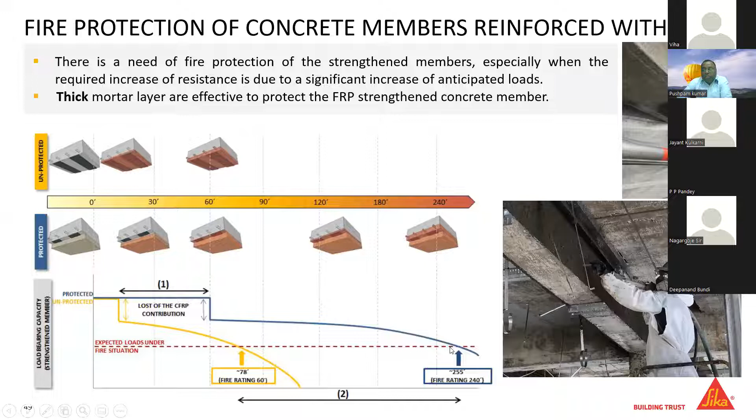Some local references: in Vizag refinery, there was a fire accident and the structural members got damaged. These structural members were later strengthened with CFRP, and to protect it from further fire hazard, it was protected with Sikacrete-213 F fireproof mortar.

Another reference is the Hyderabad International Airport project, wherein some of the column members were strengthened with CFRP, and later the CFRP strengthened sections were protected with fire protection mortar. You can see the application here.

Very easy and simple to apply. This is a wet spray applied fire protection mortar, and once the application is done, hand troweling is done on the protected surface. Later, we can do painting or any kind of protective coating on the surface. So with this, I thank you all.

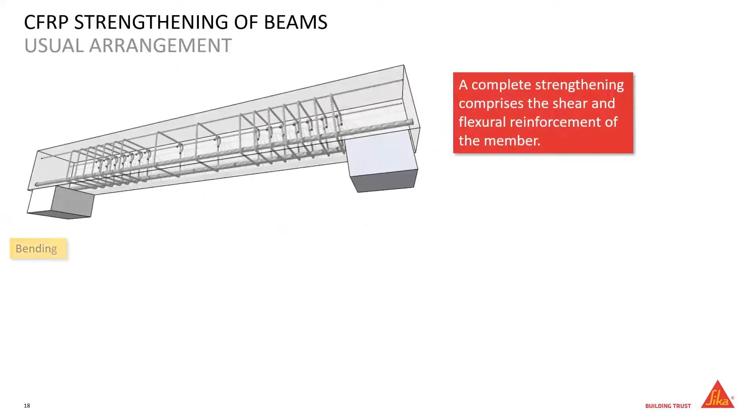So what happens when there is a load coming on the beam? When you draw this bending moment diagram, it would look like this, and there is a point of intersection. Between this point, the strengthening has to be done. There is no need to go inside, because there is a general perception that the carbon fiber has to be inserted inside the concrete section. There is no need — the carbon laminate can be installed directly on the beam section from edge to edge. And in case any additional anchorage is required, carbon anchors are available for increasing the end anchorage.

That's correct. In normal conditions, carbon laminate need not go inside the concrete, unlike reinforcement steel. Exactly, sir. People are used to inserting reinforcement steel inside the concrete, that's why there is confusion. But here it is not required.

Next question: in case of earthquake or wind, stress reversal will be there — then what will be the effectiveness of CFRP? Very good question. In my video I mentioned there is a dead weight and then there is an impact load. Whenever we are doing structural strengthening design calculations, when designing, you get a checkpoint of whether this is designed for seismic or not. For seismic or additional wind forces, there are clear guidelines given in the ACI 440 code, and using those guidelines this design can be done. So an additional factor of safety has to be used for seismic or wind forces. In short, stress reversal is not much of a problem — that can be taken care of by properly placing the laminates and wraps.

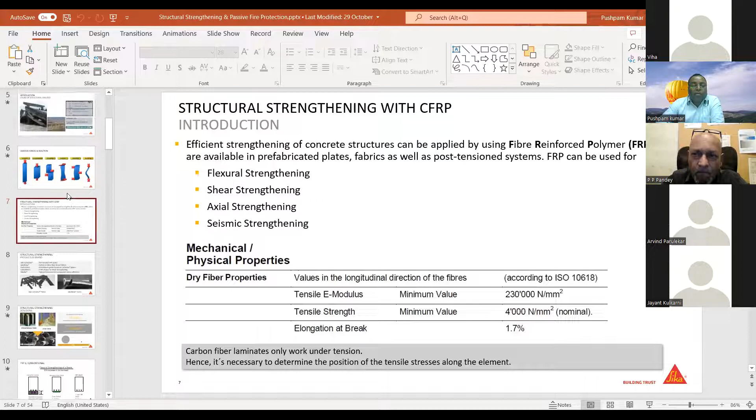Second is, what is the basic principle? The basic principle is enhancing the load carrying capacity, as I mentioned initially, due to the loss of reinforcement. First we need to understand for what application we are doing the strengthening — as in the first slide, what is the reason for structural strengthening: whether we are increasing load carrying capacity, repairing a damaged section, or modifying it. I think the relevant answer is that it is used in 2 circumstances. For a vertical member, the principle is confinement.

Yes. Like say for columns, the FRP is used for confining the concrete, and confinement increases the crushing strength of the concrete. In case of flexural members like beams and slabs, it is the tensile capacity of the bottom fiber which is increased by introducing FRP. So these are the basic principles of working. And more cannot be explained in this small time.

Then the third question is, how durable is carbon fiber wrap? So Sika has been working in this section for epoxy for more than 50 years, and on carbon fiber more than 30 years. The first commercial application was done in 1991 in Switzerland in one of the bridge projects. So Sika has more than 32 years of practical application, and the test for interlaminar shear failure has been happening for more than 50 years, and this is the current available data.

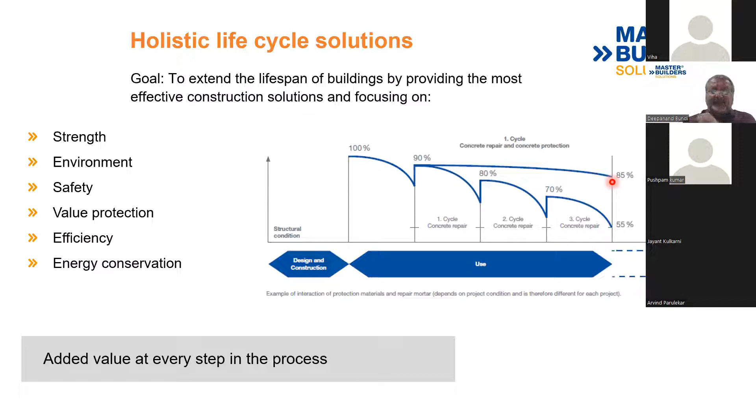Now, this service life of a structure is primarily divided into three parts. We're talking of a technical service life. What is a technical service life? It is the time in service until which a defined unacceptable state is reached, probably spalling of the concrete, safety levels below acceptable standards, or failure of the elements. That's where the technical service life of a structure is challenged.

We are talking of a functional service life. What is a functional service life? It is the time in service until which the structure no longer fulfills the functional requirements. For example, earlier it is a cold storage where fish or food items are stored, and now suddenly that space has been converted into an office space. Somebody has rented it out to someone else. So the function of the structure has changed, and accordingly the service life will change.

And then there's the economic service life. The economic service life is the time in service until the replacement of the structure or part of it is economically more advantageous than keeping it in service. It's better to get it replaced than to continue with it, because it's going to degrade further as time passes by.

Now, these functional service lives of the structure can be further divided into 4 phases. Phase 1 is when you have just constructed the building and you are monitoring the building: a new building, a structure, a commercial office, an industry, a warehouse, a godown, any structure.

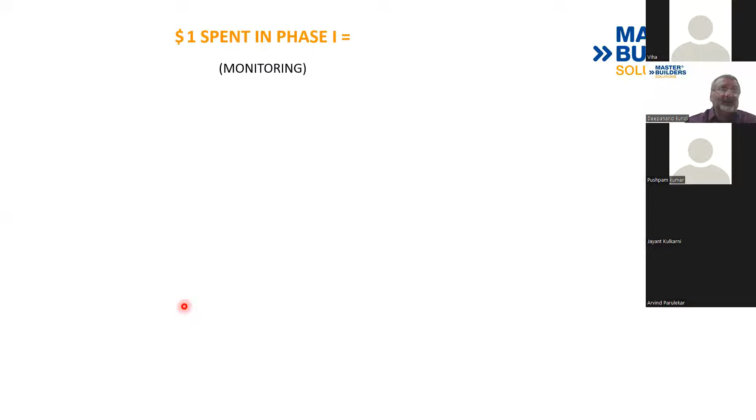And if you look at the amount spent, if you spend about $1 in phase 1, that is during the monitoring phase, it is equivalent to spending $5 in phase 2 when you are doing preventive maintenance before the corrosion has happened. And if you don't do that, you will end up spending $25 in phase 3 when localized initiation of corrosion has happened. And if you don't do that at that time, you will end up spending $125 in phase 4 when you go for a generalized repair for the entire corrosion protection that is required.

So this is the famous De Sitter's law of 5, we call it. The structure says you pay me now, or you pay me later. It's like buying a vehicle and not servicing it. When you buy a car, you need to service your car and spend regularly, right? And if you don't do that, your car is going to go into bad maintenance, will not give you the mileage, etc. So concrete is somewhat similar to the vehicle. You either pay me now or you pay me later.

Now, let's see the different environmental conditions that affect corrosion. I know Parulekar sir has already briefed upon that, but I will just touch upon it. The major factors are chlorides, carbon dioxide, sulfates, mostly from water and subsoil, and water itself, H2O. So these are your friends of corrosion. You should avoid these elements entering your concrete or getting in touch with the reinforcement to form various oxidation states of steel.

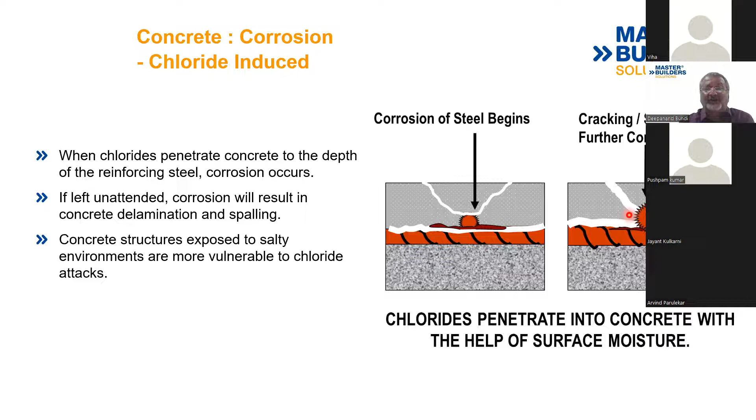Two definite problems in corrosion: the first is chloride-induced corrosion. This is where the chlorides penetrate to the depth of the reinforcing steel and react with the steel. The Cl reacts with the Fe to form ferric chlorides, ferrous oxides. O2 will come from H2O, and then there is expansion of the steel bar, and this expansion pushes the concrete with stress, and that's where your concrete fails. So mostly these are chloride-penetrated corrosions.

The expansion of the reinforcement bar is roughly measured at more than 600% of the original steel bar. With the various oxidation states that are formed, you can imagine the amount of expansion we are talking about on a normal reinforcement bar. So that's chloride-induced corrosion.

Then we have carbonation. If I get time, I will cover the next capsule, which is on carbonation. Basically, carbon dioxide is there in the air. We all know it's about 0.04%. This carbon dioxide, when it reacts with H2O, forms carbonic acid. That carbonic acid combines with the calcium hydroxide and turns it into calcium carbonate. This calcium carbonate, when formed, reduces the pH of the concrete. And when the pH of the concrete is reduced, your corrosion process is accelerated.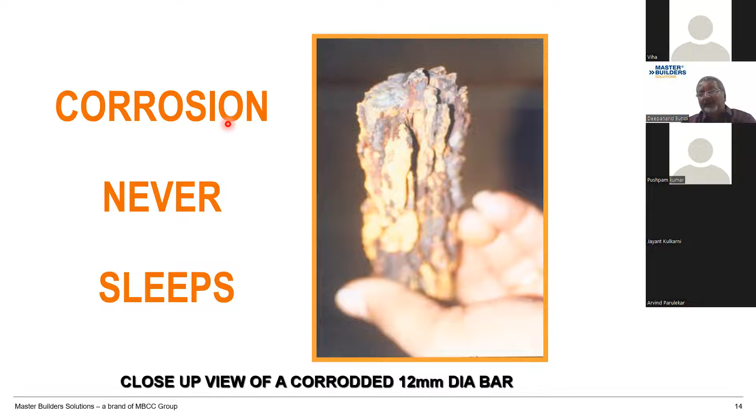So to sum it up, we are talking of chloride and carbonation attack happening. It lowers the pH. There is expansion of the steel, like you saw in the last slide. Development of cracks happens. When there is expansion of steel, the stresses that are developed are going to push the concrete away. Steel has a much higher tensile strength than concrete, so it's going to exert that pressure on the concrete. Because of that, the concrete cover is going to spall, and when the cover spalls, there is again exposure of the steel, and now there is a direct attack of chloride and carbon dioxide on the reinforcement bar.

So if you see, this is like a circle that is going on. It will keep on going. We call it the vicious cycle, and that's where we need to step in and provide different types of protection to the concrete surfaces.

The protections vary. For corrosion prevention techniques, you can talk of electrochemical systems, like anodic protection and cathodic protection, with anodes that are very easily available nowadays. Anodic protections are already established in the market. In terms of chemical techniques, you have inhibitors that are either mixed into the concrete or applied on the surface. You can change the composition of the electrolyte. You have protective coatings available today, which are polymer based coatings, cementitious based coatings, and zinc rich epoxy based coatings.

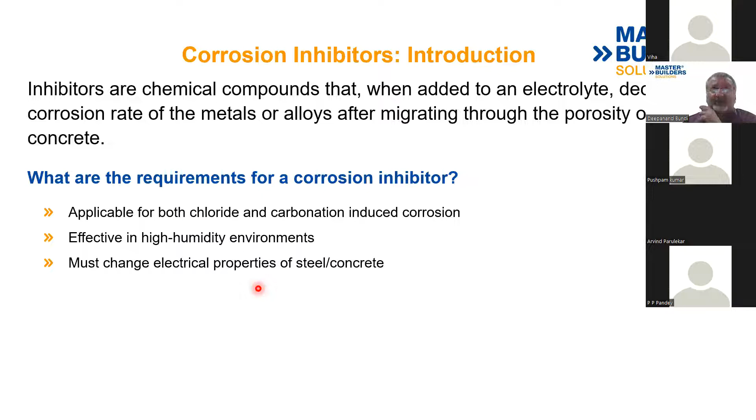It should be able to control both, as I said, corrosion due to chlorides and corrosion due to carbonation. It should be effective in highly humid areas. India per se is a humid area; we have a long coastline. It should change the electrical properties of the steel. That means the Icorr value should be in control and very low. It should have a good service life and should be effective on concrete which has

cracks. Maybe after you cast your concrete wall or a retaining wall or a structure, the concrete is going to crack; it's a brittle material. So my protection should be able to prevent the corrosion even after the concrete has cracked. The performance should be proven by lab tests, and the functionality of the inhibitor should be proved, of course, at site itself. So if you look at the technological overview, I'm talking of a dual phase corrosion inhibitor, which offers state-of-the-art protection for your reinforcement bars.

Now, the highlight over here is I'm talking of a dual phase corrosion inhibitor. What does that mean? It means that it's a revolutionary blend of high quality silane and an additional corrosion inhibitor. Now, what do silanes do? Silanes are very good water repellents. So when you apply the silane on top of your concrete, it is going to remain on the surface, and these molecules with high vapor pressure with corrosion inhibitors are going to penetrate inside. It delays corrosion and reduces the active corrosion even on cracked concrete.

As I said, it's effective against both chloride as well as carbonation-induced corrosion, significantly reduces water ingress, and strengthens the passive layer on the reinforcement. So it goes and forms a layer on the reinforcement bar and increases the resistivity of the concrete. These are the important highlights. The requirements are to be a clear liquid that, when applied on hardened concrete, combines the power of a penetrating inhibitor and a latent phase inhibitor. Right?

Sir, we can't hear you. Deep, sir. Sir, your voice is lost again.

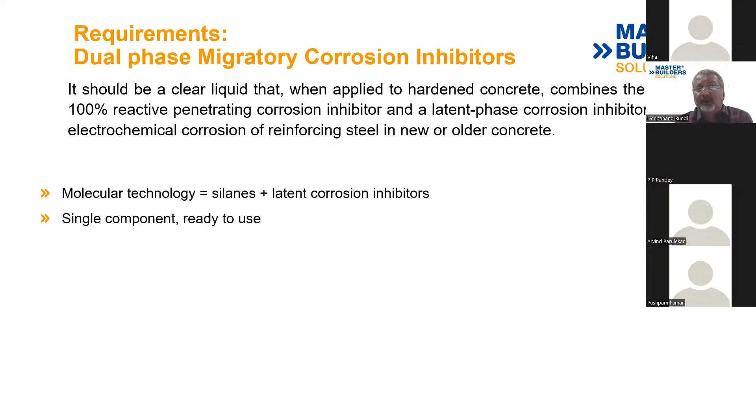We have people at site level with their intelligence level. We do not want a very complicated application process per se, so that's very important for us to take care of it. Then it should also have easy to spray, single component, and should not change the concrete appearance, user friendly, non-hazardous, should have a high flash point.

We did actually some tests in a few of the port sites, because a port or a jetty is something that has alternate wet and dry splashing conditions. So we've got some very encouraging results over there. That's how the surface applied corrosion inhibitor is going to work. When you apply it on the surface, it's going to penetrate inside and protect the reinforcement bar.

If you talk of these, it primarily employs dual functionality. As I said, the silane base provides similar water repellency, and corrosion inhibitors are carried into the concrete along with the silane. So what happens is the pores of the concrete also get coated with silane. It avoids any water from going inside, because H2O is one of the important ingredients that you need to avoid from entering, so it provides a barrier towards that.

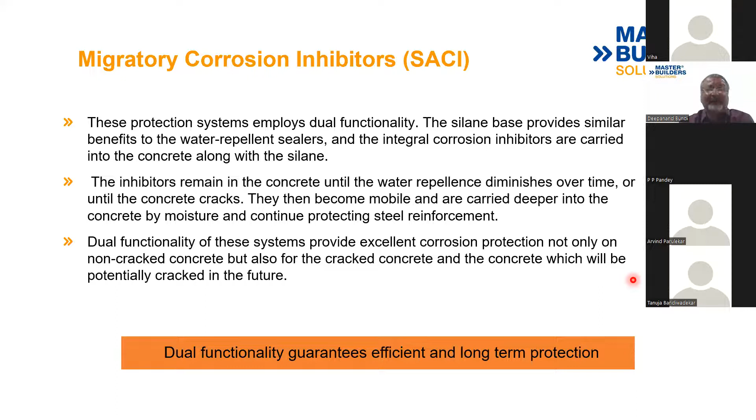The inhibitors remain in the concrete until the repellency diminishes or the concrete cracks. Once it cracks and new water comes in, the inhibitor moves with that water and still keeps on penetrating and protects the steel. They provide excellent protection not only on uncracked concrete, but also on cracked concrete or possibly concrete that may crack in the future. So because of its dual functionality, it guarantees efficient and long-term protection.

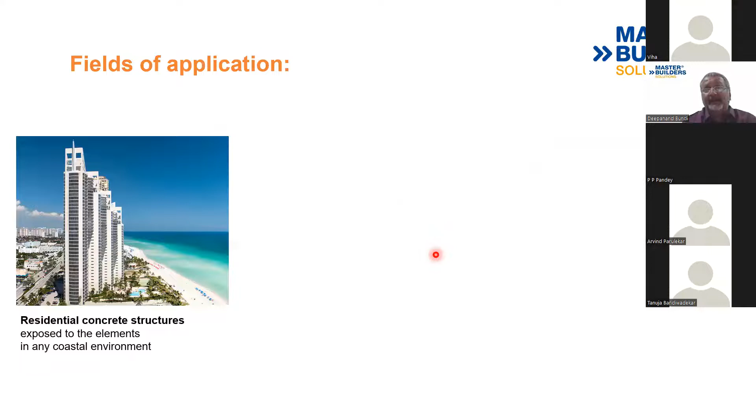The application is pretty much very simple. I will not take much time into this. These are the basic fundamentals before you apply any of the coatings - your concrete should be properly cured, surfaces should be dry.

The reason I'm saying dry is this is not an epoxy coating, so there's no mandate requirement since it's not a solvent based coating that you should have a dry surface, but it's better to have one. The only reason is the ingredients penetrate better inside. If there is water or humidity or a damp surface, the effectivity of the product will reduce, and eventually you may have to apply an additional coat. So it's always better to have a dry surface. There's no adhesion loss or anything per se, it's only to enhance the performance.

Any delaminated or spoiled concrete should be repaired, cracks should be filled up and treated, and only then should you apply this. That's the basic substrate preparation that should be done. The concrete surface profiles, as per ICRI guidelines, are generally CSP 3 to 5. It's much better to have them.

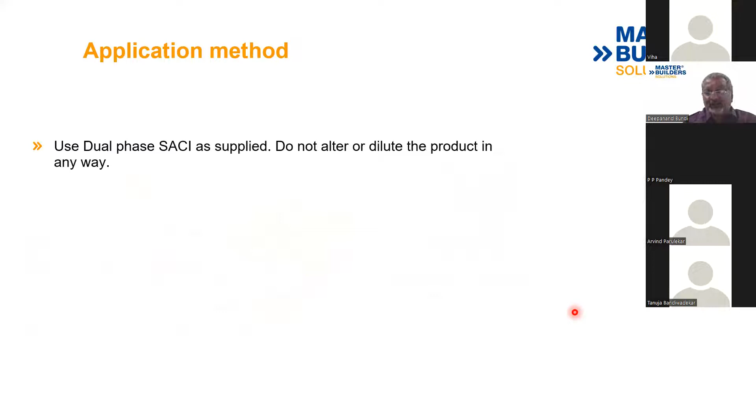The application methodology is pretty simple. Open it as it is - there's no dilution, it's a ready to use material, so at site there's not much of an issue. Protect surrounding areas in case of overspray, and apply it on dry concrete, as I said, for better penetration. Allow it to penetrate inside, and after 15 to 20 minutes you can apply the second coat. Generally we recommend a minimum of 2 coats for any protective coating system. In highly exposed conditions like coastal regions, you can apply an additional coat for better penetration.

You can see these applications, mobile equipment can be used to spray. As proof of concept, we have tested the products in various labs in Spain, Germany, the US, and with the Federal Highway Administration. These testings have been elaborately done in terms of exposure conditions for chlorides as per ASTM G109. You can see the setup.

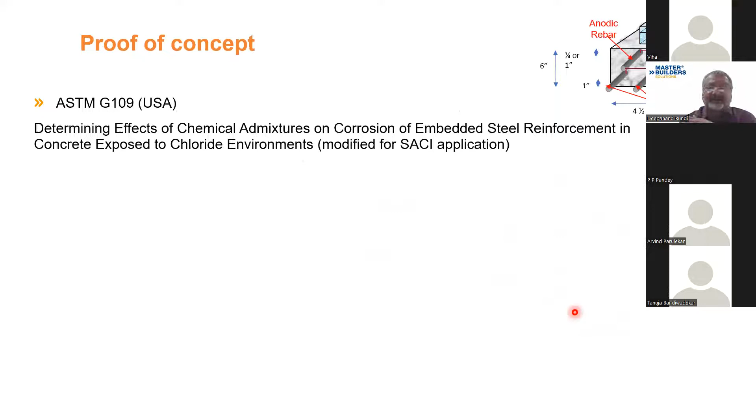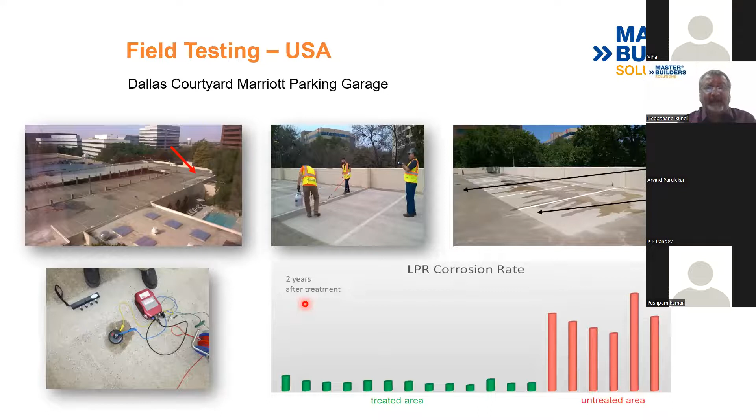So on the Dallas courtyard, we did the LPR rates. Basically this is in the US, and we did the linear polarization rates on untreated and treated surfaces. You can see the untreated surface, and this was done after 2 years by an independent third-party lab over there, and that's the results. Because all details are available, I cannot put up everything over here, but I can share if anyone would be more interested in this.

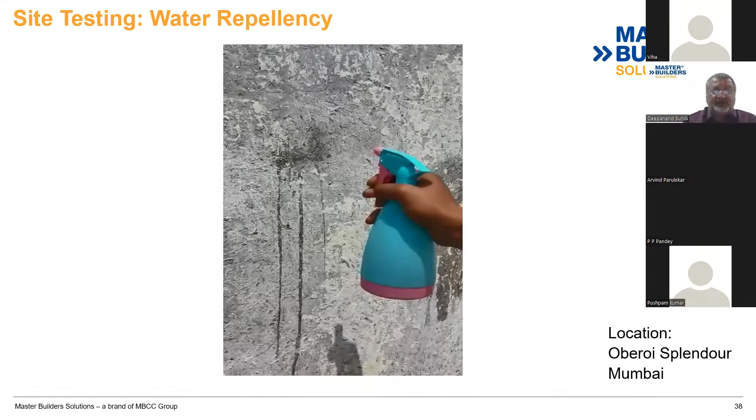And if you look at the benefits as a specifier, or as an asset owner - if you have your own assets and need to protect them - the important highlights for the product are: because they are nanomicrons, they penetrate very easily, and the silanes give you water protection, water repellency. The surface remains unchanged. It delays the onset of corrosion and reduces active corrosion very significantly. You can see the half cell potentials at the same point have reduced drastically after the application. They are effective against chloride and carbonation.

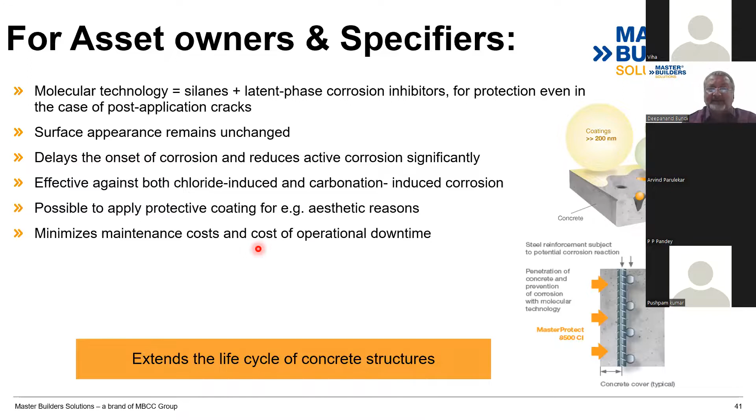So if you calculate the life cycle cost analysis of a structure, it's definitely going to help and extends the life cycle of the concrete structures. These are a few benefits for asset owners or the clients and the specifiers when they look at it.

In terms of applicators, they have their own benefits. It's a proven corrosion protection even in case of post application on cracks. Even if the concrete is cracked and then you apply it, you will still be getting the benefit of it. It's ready to use, so you don't need to worry about mixing or diluting or weighing it at site. So in terms of application, it becomes very easy.

It does not require any high cost equipment. It's pretty simple. You can even apply it by a roller or a brush, and it penetrates inside. It's easy application. Two packages are available in terms of packing sizes. It's possible to apply a protective coating again, and importantly it has a very low VOC and a high flash point. Having a very low VOC is very important because the fumes don't get to the labor, and it helps us.